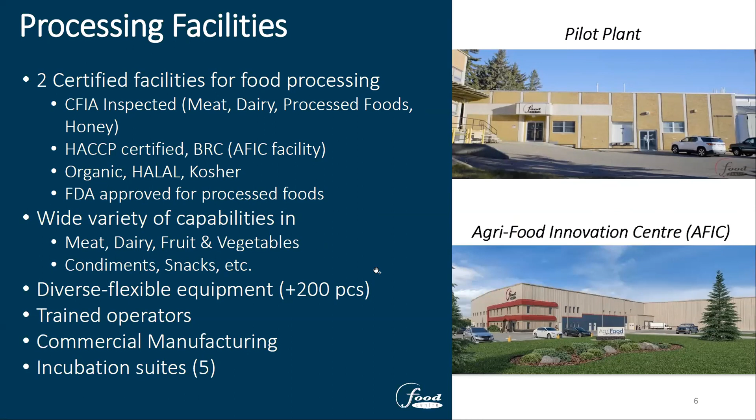We have two processing facilities: a pilot plant on the University of Saskatchewan campus, and the Agri-Food Innovation Center on Schuyler Street. With two certified facilities, we help industry and companies produce meat, dairy, processed foods, and honey. We're HACCP and BRC certified, and our AFIC center has organic, halal, and kosher capabilities, with a wide variety of capabilities including incubation suites and over 200 pieces of equipment with trained operators.

We have a product development team working on different products, scale up, process development, sensory, shelf life, nutritional labeling, food safety, and helping companies with different funding applications. It's almost like a point of entry for the program.

Over the years, we developed very interesting plant-based products, very successful vegan meat products developed for startups to multinational companies. There's major institutional expertise in custom meat analogs, TVPs, and plant-based fibers. If you look at the overall plant protein innovations, there are plant-based ribs, chicken kebabs, calamari, and different products available within our portfolio.

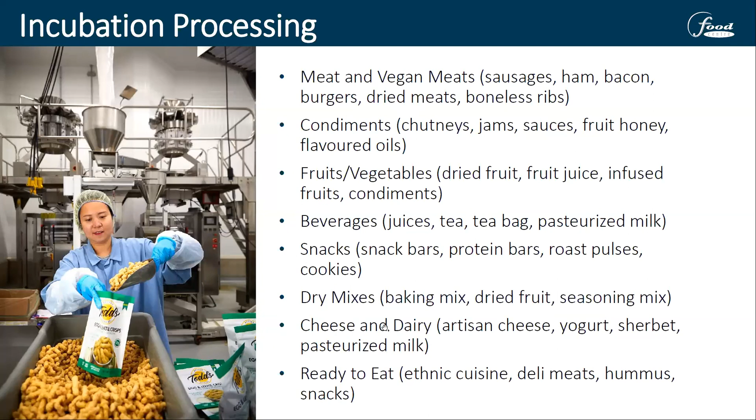We can also help the industry with different snack clusters, energy bars, bakery, or extruded products. In the incubation processing, we can help companies with meat, vegan meats, condiments, fruits, vegetables, snacks, dry mixes, cheese and dairy, as well as ready-to-eat products. There are several production capabilities for companies as they look to produce these products.

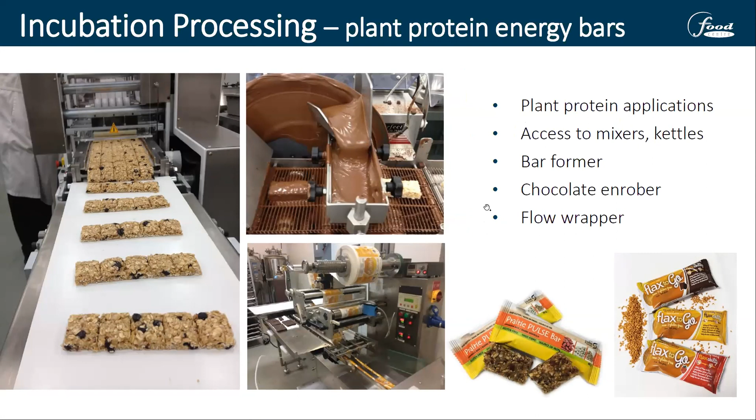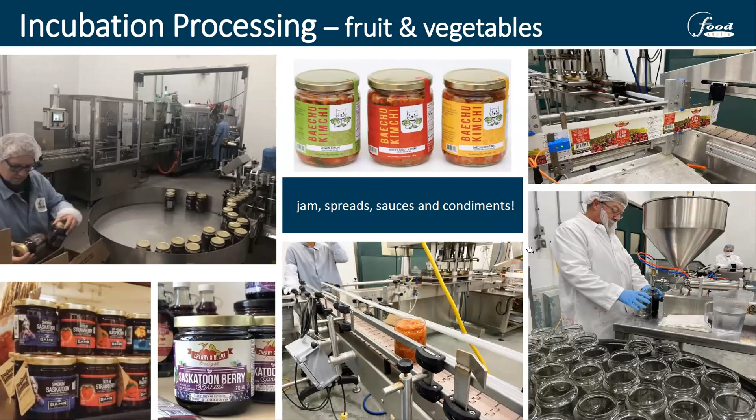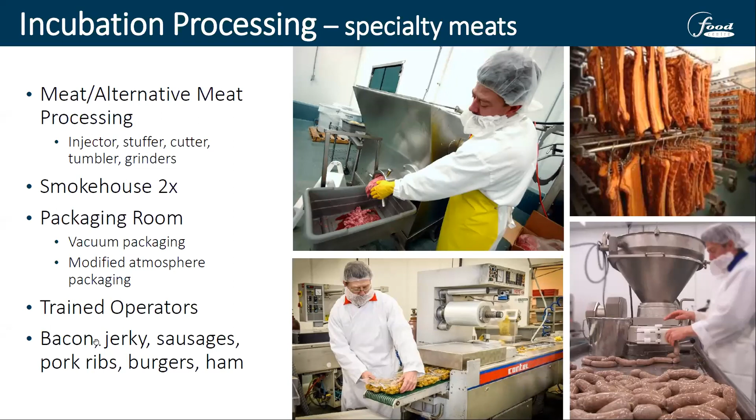One example would be an energy bar - we can do about 5,000 bars a day, producing about 25,000 bars a week for companies based on their needs. In terms of fruits and vegetables, we have low acid and acidic product applications and production capability, primarily jams, spreads, sauces, and condiments, which we can manufacture for regional and national companies. We can also produce specialty meats, both meat and alternative processing capabilities, such as bacon, jerky, sausages, pork ribs, burgers, and ham.

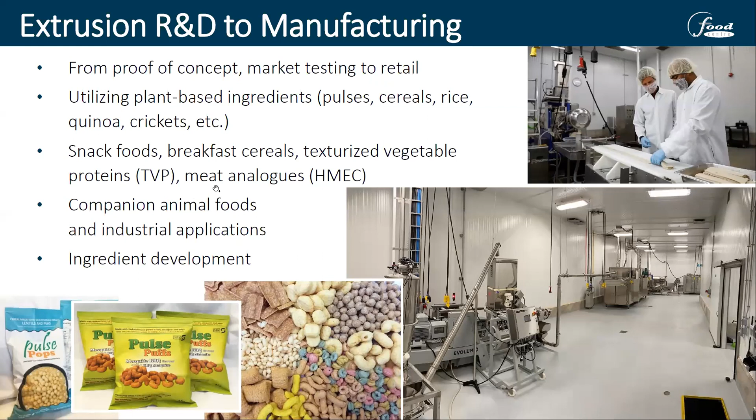In extrusion R&D and manufacturing, from proof of concept to market, we can help companies develop plant-based ingredients, snacks, cereals, texturized proteins, meat analogs, plant-based meat, plant-based pet food, or different extruded ingredients. These are all the different capabilities we can do.

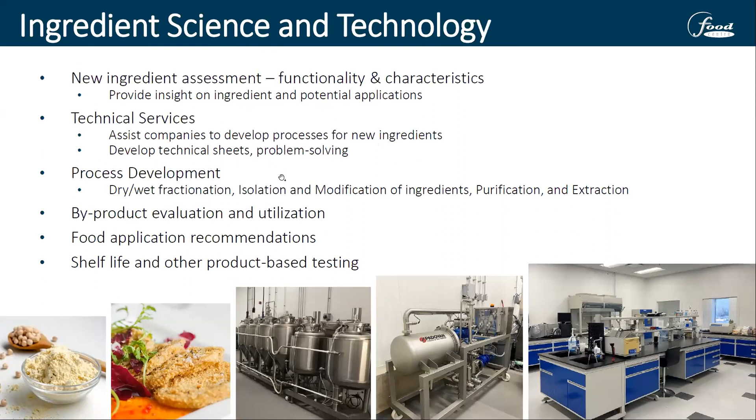In the Ingredient Science and Technology program, we can look at ingredient assessments, technical services, process development, byproduct evaluation, food application recommendations, and shelf life testing - a lot of different capabilities in that area.

In the food safety development training, we have online training as well as in-person training for HACCP or GFSI programs. We provide certification, auditing guidance, plant-specific training, development and implementation of food safety and quality programs.

We have a food crop quality program focusing primarily on partnering with Saskatchewan pulse growers, working on G by E studies, testing about 3,000 samples of pulse varieties in Canada.

We also have an engineering and data-driven process analysis program, where we can look at process simulation, sustainability, LCA analysis, techno-economic analysis, as well as certified process authority, especially in thermal, aseptic, and low acid foods, so we can help the industry within their needs.

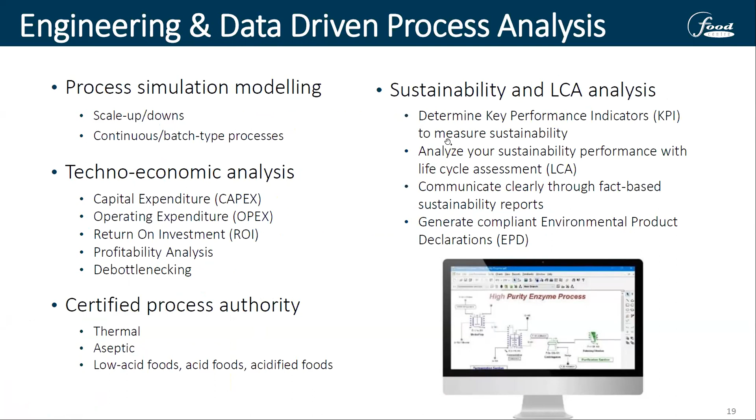Pathfinding services is basically connecting all the dots for startups, SMEs, or larger companies to introduce them to the food industry community, educational institutions, and government organizations, helping them with our industry networks and connections to find different types of tools and support or funding from different programs.

The Awesome program was established in 2019 as an agri-food women-owned entrepreneurship starter program for startups. We just finalized our first program, helping about 300 women entrepreneurs in Alberta, Saskatchewan, and Manitoba. We recently received funding and are now looking at adding new capacity from Alberta to BC, Manitoba, Northwest Territories, Ontario, Quebec, Saskatchewan, and Yukon, primarily focusing on rural entrepreneurs, rural women entrepreneurs, Indigenous entrepreneurs, those under 39, and newcomers. That will be the focus of the new program.

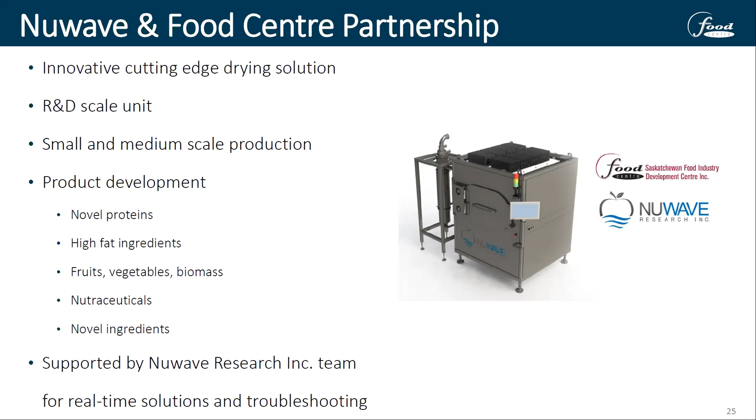Our partnership with NuWave involves really innovative, cutting-edge drying technology, which Greg will be presenting. They were really generous, kind enough to house their unit at the Food Center, and we are working on new projects together. It's an R&D scale unit where we can do small to medium scale production trials, product development on novel proteins, high-fat ingredients, fruits, vegetables, different biomass, nutraceuticals, and novel ingredients. The overall collaboration is supported by the NuWave research team for real-time solutions and troubleshooting.

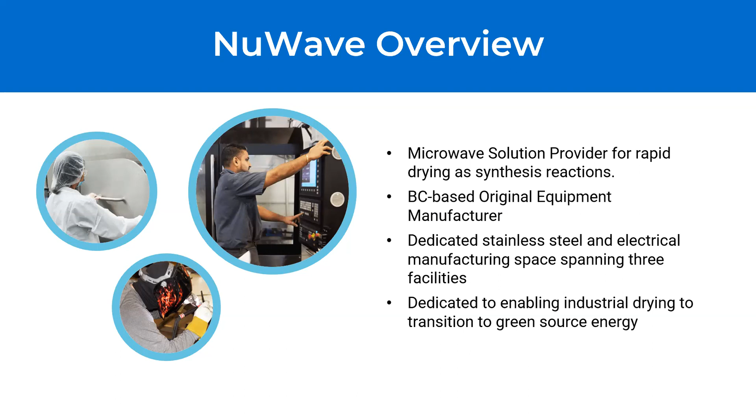Although we have our own testing facility, we are delighted to have one of our machines at the Saskatchewan Food Industry Development Center. Their team of experts will support customers in developing solutions for industrial food applications, as well as guidance for incorporating vacuum microwave dehydration into their processes.

I've been asked to give a brief introduction of microwave technologies. Microwaves are everywhere in our daily lives. However, it's important to know what they are and what they are not. The spectrum of electromagnetic energy spans from radio waves all the way through visible light and on to gamma rays, which is what we normally think of as radiation.

Microwaves are not ionizing radiation. We are surrounded by microwaves in our daily lives, from Bluetooth to cell phones.

Unlike convective drying, where energy is transferred from one material to another, microwaves target the water molecules. Well, they target polar molecules, and water is just a very abundant polar molecule.

Air drying heats from the outside of the product, and as that product dries, it loses the moisture on the outside. It creates a barrier to prevent water movement. As drying progresses, the efficiency of the drying decreases as that outside case hardening increases.

In microwaves, the application of energy is delivered to the core of the product. The energy turns the water into vapor, which pushes to the surface of the product. Therefore, the outside surface remains wet. This allows the water to wick away quickly and increases the rate of water removal and therefore energy efficiency.

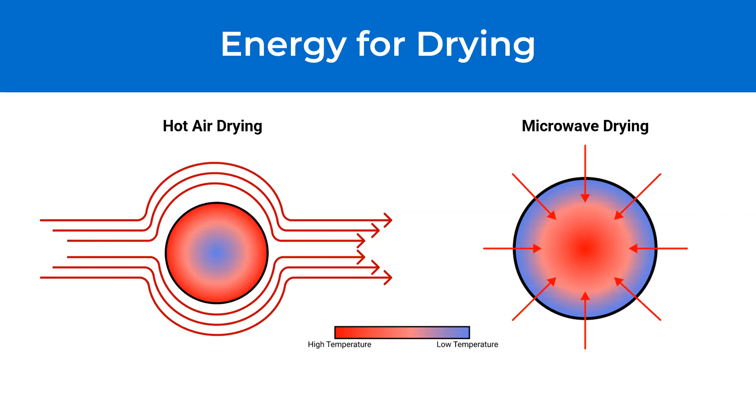Where two high energy levels overlap, we have an additive effect and the energy spikes. Where a high and a low overlap, we have energy being canceled out. This is commonly referred to as the hot and cold spot phenomena. As a result, products are subjected to very high power levels for short bursts of time, and then no power for other moments in time.

This unevenness in power distribution has quality consequences. Further complicating things, as the products dry, their ability to absorb microwave energy changes. We've referred to this as the product drying profile. These changes not only affect the overall heating events, but they also result in disruptions of the wave patterns, so you've got further randomization.

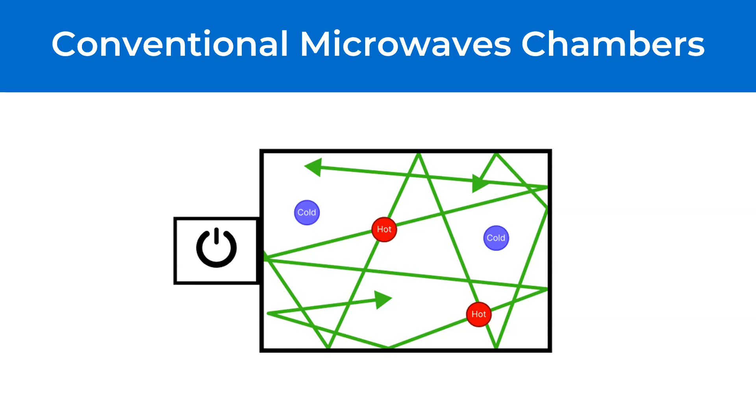Consumer microwaves move product around to randomize that microwave field in order to attempt to more evenly subject the product to microwave energy. I think it's clear there's a lot going on in a home microwave. However, the take-home message is that conventional microwave chambers result in uneven heating. This is why some of your dinner is hot while other parts remain cold.

So as the product dries, the microwave absorbing properties change. We can change the energy applied to match the drying requirements. While others flood their chambers with high power, we apply the energy at different levels at different locations within the same chamber. The net result is we do not overheat the product when drying. We preserve the aromatics and the volatiles, the taste and the flavor. This increases product quality.

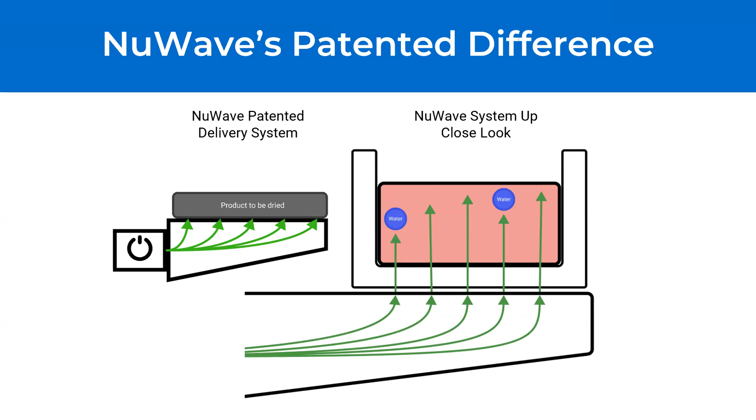All our systems have remote monitoring data historians. Sensor feedback, vacuum pressures, and power levels are all monitored. The data is collected and available through trend analysis software that can be used to drive the innovation process. In addition, real-time support is just a few clicks away. Our team can be invited to help you solve problems without waiting for service people to come out to your site. Operating programs can be modified remotely. In addition, recipes can be developed without visiting your site. The iterative development process is accelerated.

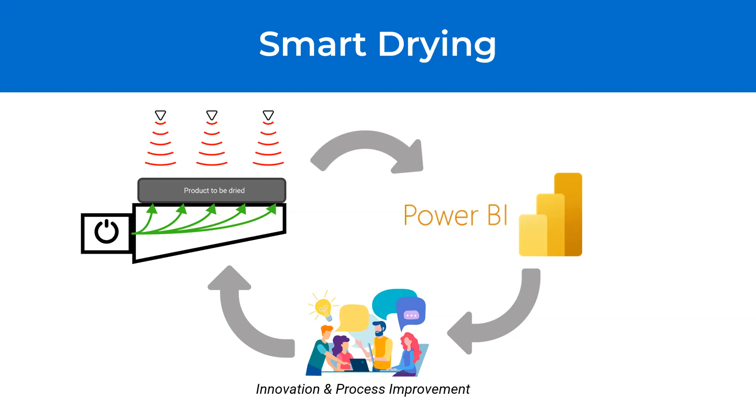With all this power, we can customize our machines for different industries. It's really quite exciting. New products come to us every day. The Saskatchewan Food Industry Development Center will be able to help food applications move from concept through the validation process, and NuWave will be there to support.

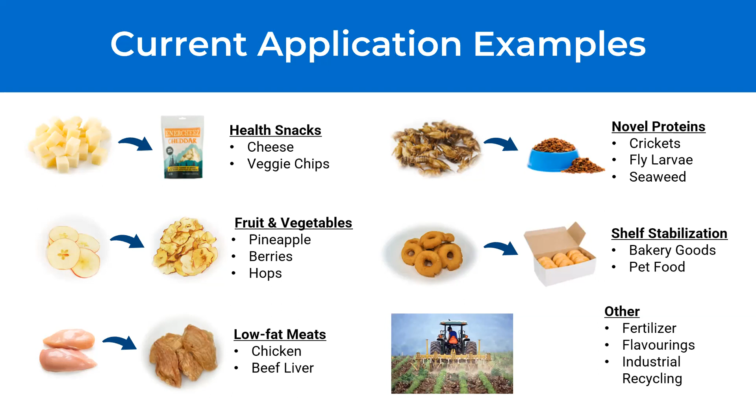On a daily basis, we see products from the pet food industry, beverage industry, milks, novel proteins, dairy products. You never really know what's going to come through the door the next day. Companies using the Atlas system at the food center will have a clear pathway for scale-up. Although the Atlas is a tray-based system, its core functionality can be extrapolated to our tumbling processors, our mixing processors, and even our belt processors.

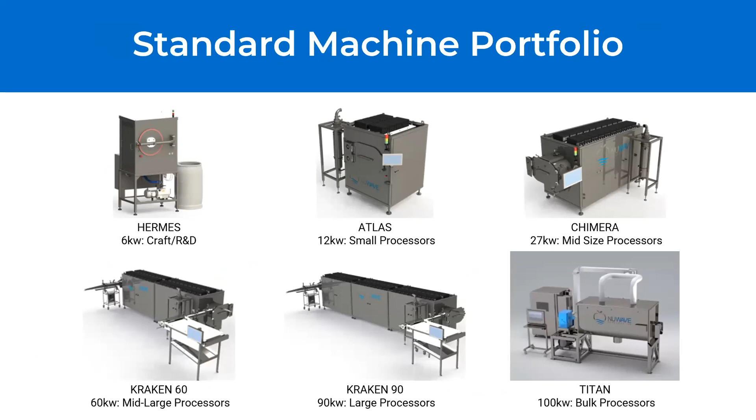Our product offering spans from 6 kilowatts all the way up to megawatt systems. We have systems that operate at 2.45 gigahertz as well as 915 megahertz.

Vacuum microwave is disrupting traditional drying alternatives. Freeze drying, although it is a nutrient-sparing process, relies upon sublimation, the process of converting ice to vapor. It's very slow. In addition to the energy required for drying, there's energy required to freeze the water that you actually want to remove.

As a result, this process is expensive and time-consuming. Installation of freeze dryers takes weeks, if not months. Our vacuum microwave dryers have a much smaller footprint. Our machines can be wheeled through standard double doors with only a few days to install. Processing time is now in minutes rather than hours.

Hot air dryers, as discussed, are prone to case hardening problems. As a result, higher temperatures are required, and as the product dries, it becomes even less energy efficient. Initially, the sticker price seems low, but once you factor in the true cost of ownership, air dryers are actually quite expensive.

Spray drying takes a large amount of power and is expensive to install. In addition, the products often have to be diluted to pass through the spray nozzles. So not only is the process using air to heat, but it's also adding additional water, which further increases the amount of energy required and decreases the energy efficiency of drying your product.

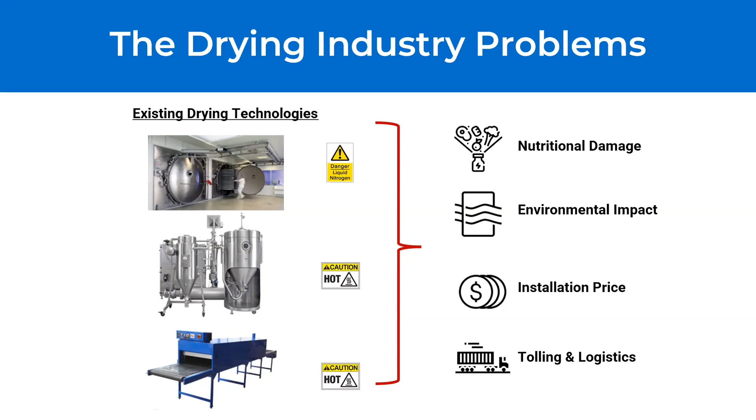And with the price of natural gas increasing, electricity has become more attractive. It also lowers the carbon footprint. The efficiency of microwave heating versus air heating makes the overall operational costs of vacuum microwave drying even more attractive.

Our commitment to service extends well beyond the installation. Our machines have state-of-the-art connectivity, best-in-class protection, a self-generating encrypted private portal back to our support team and database. We can analyze the data, monitor the performance of components, recommend service and support schedules, and even tap into our vendor-managed replacement parts to avoid downtime and maximize your returns.